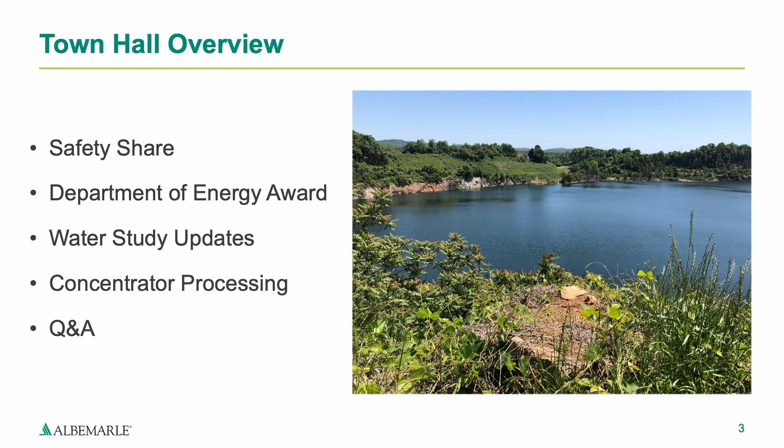Like I said, we have also the safety share. We're going to be talking briefly about the DOE Energy, Department of Energy award. We're also going to have the water studies and the concentrator. At the end, we're going to have some Q&A, so please feel free to ask questions while we're talking here and during the presentation, but also at the end of the presentation we will have a general Q&A.

Okay, with that said, we're going to get Ron Lindsay. He is going to talk about a safety share, which is our core values, how we protect our people, and how do we make sure that we work safely in every area that we work. Go ahead.

Hello, everybody. Thanks, Fernando. As Fernando said, I'm Ron Lindsay, the safety manager. Like Fernando said, one of our core values is safety, so I'm just going to give you a quick safety share. We start every meeting with the safety share, just something real quick, but it's very informative.

First thing I want to talk about, though, is if something happens here and we have to get out, we can come in the way you came in, but if we can't get out that way, we've got 2 exits on each side, so you can exit out that way as well. So that's how we go if there's an emergency. Hopefully there won't be one tonight.

What I want to talk to you about is ergonomics. Ergonomics is a big deal. They say there's about 2 million back injuries a year, but only 15% of them are due to things like falling or a car wreck. So 85% of them usually happen at home, and it's due to improper lifting, twisting, turning, that stuff. Our body's designed to stand upright like this.

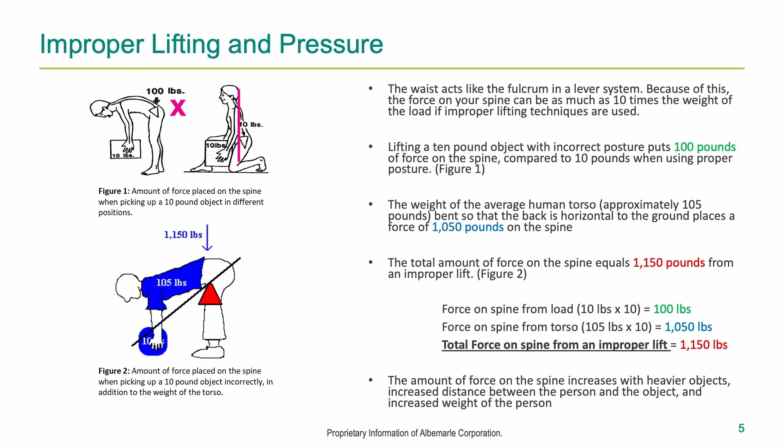Okay, so that's why it's important. We've always been taught to lift with our legs and keep our back straight, because you can see there in that picture right here, it's 10 pounds and I have my back straight. That's how much force is on my spine. But our spine is also like a lever, so when I bend over and go to pick it up, it puts 100 pounds of force on my lower back, because it's like a fulcrum of a lever.

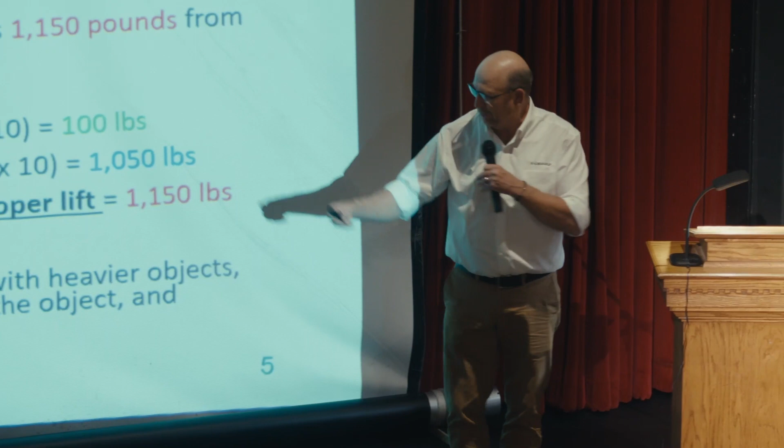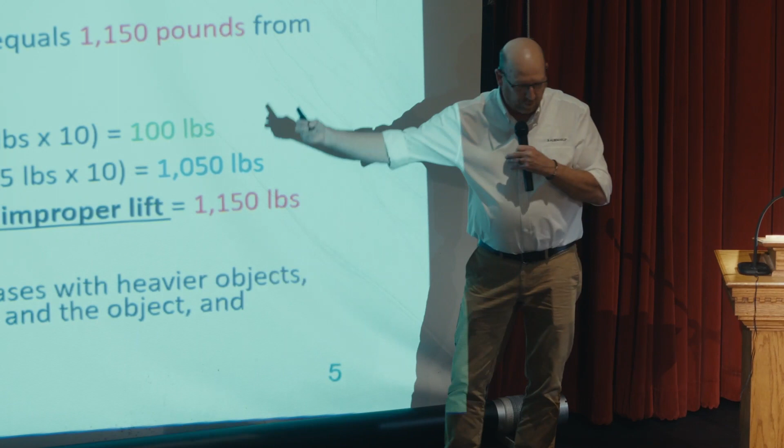Then it says the average, I don't know where they get these, the average torso weighs 105 pounds. Mine's a lot more than average. But so you put another 1,050 pounds of force on there as well, and it actually adds up to 1,150 pounds of force on your back if you're not lifting with your back straight. So that's very important to do that.

This is another good picture that we like to show. Just like when we're carrying stuff at home, at work, wherever, just keep it close into your body. You can see there, it shows you a green zone, yellow zone, and a red zone. And we've all packed stuff. You know, the closer to your body, the easier it is. You hold it clear out here, it's hard to carry for very long.

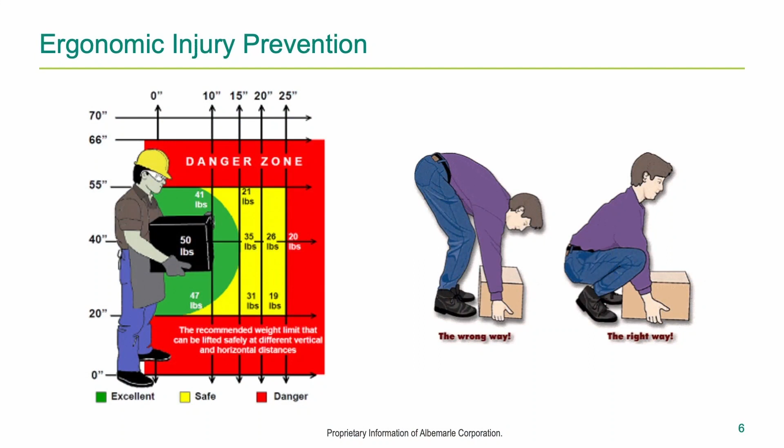And you can see here the proper way to lift. What I tell people at work and stuff is if you have little kids at home or grandkids at home, set something on the ground, ask them to pick it up, and they automatically do it this way. And then they grow up watching us do it the wrong way, and then they start doing it like that. So just be mindful of that.

This is a big one. This is a new thing that's coming about, and you may have heard this - it's called texting neck syndrome. This is another thing that blows me away too. So my torso is overweight, but my head's smaller and I don't have any hair.

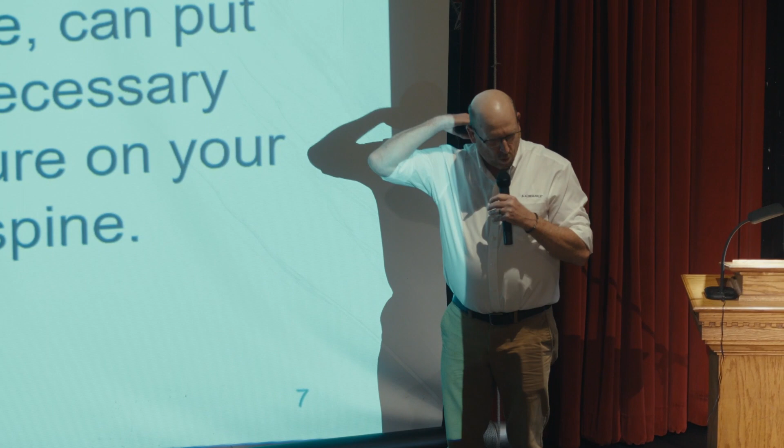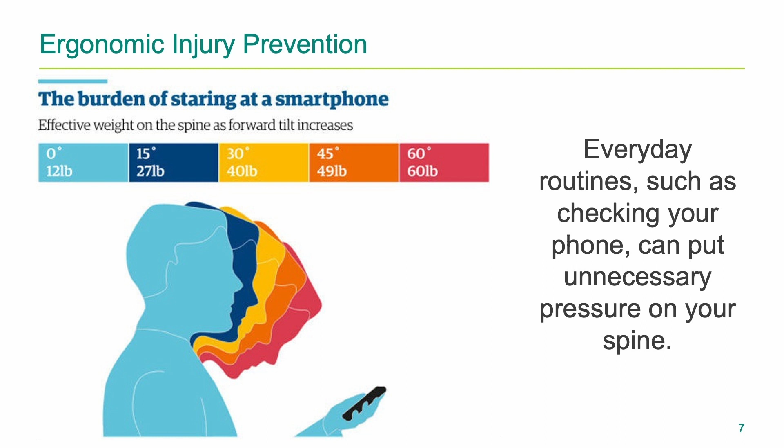They say the average head weighs about 10 to 12 pounds. So when I'm standing here with my head straight, at 0 degrees, there's 12 pounds of pressure on my spine. But when I'm looking at my phone all day like this, at 60 degrees, it increases it to 60 pounds. So just be mindful of that.

Younger kids may not be affected as much as older people. We just went through Christmas, and if you ever sat on the floor wrapping Christmas paper and got up, it's hard and it hurts - that's because of that force, that frequency, and that awkward posture. So just watch yourself. This ergonomic stuff's a big deal, and that's all I got. I'll turn it back over to Fernando.

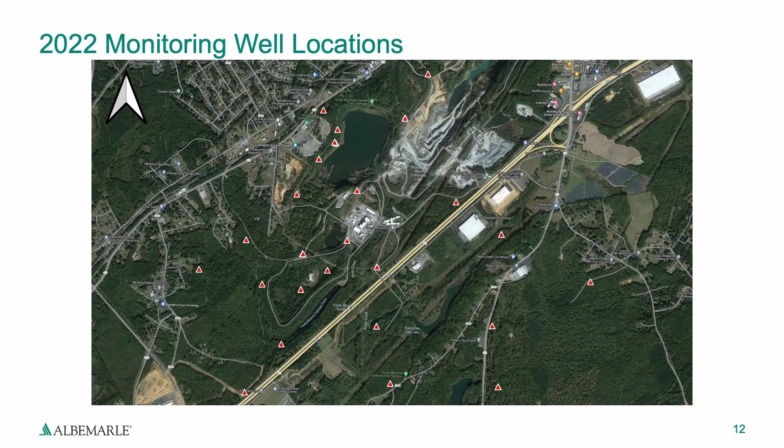In 2022, we did a lot of work to expand the groundwater monitoring network and really get all of our baseline data down for the groundwater, and really just try to understand the system and characterize what it's like on site and in the areas around site, around the pit.

The first thing we had to do was determine what else is interacting with groundwater around the site. So we had AECOM, a big engineering firm, come in and do a really exhaustive water well survey for private water wells. They used as much public record as they could, and also used Google Earth, zooming in on places where they suspected wells, where you could see wells in yards. They drove around town looking for places with the covers over wells and things like that, just to determine where there's a suspected or actual well present.

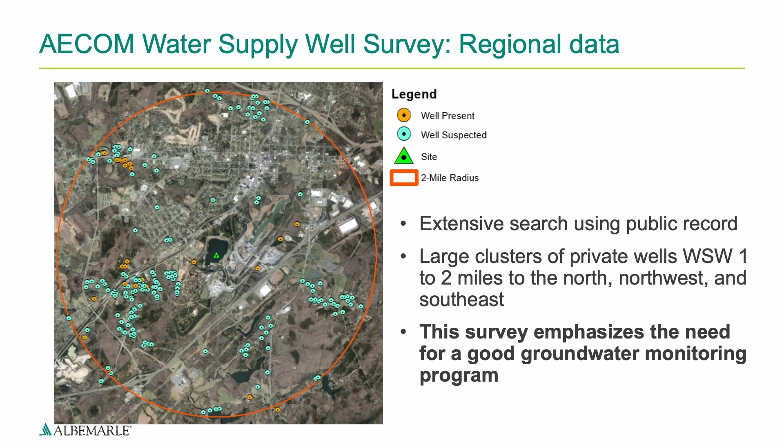Something interesting is that the North Carolina database for public water wells only goes back to 2007, so there are obviously people in town with wells older than that. They really went around and did a good job on this audit, and you can see on the map that within a 2-mile radius there's a lot of water well users and suspected water well users. So we used that information to build where we wanted to have the baseline groundwater monitoring network installed.

That's the pointer. Sweet. Okay, so

Why do you need a groundwater monitoring network? My presentation today is going to be a bit of learning for all of us on some groundwater jargon and some of the things I have to think about on a regular basis, so that when I talk to people, their eyes don't glaze over. I'll give you a couple definitions here.

When we drill a bunch of holes and install wells, we're collecting water quality data and water level data. But from those wells being drilled, we test them as well. We want to determine what's actually governing the flow of groundwater, so we do what's called aquifer testing. That's really done to determine what physical parameters in the ground allow groundwater to migrate from one place to the next.

The number one physical coefficient we try to determine, useful in just about every piece of work when talking about groundwater modeling or movement, is hydraulic conductivity. That's the parameter that tells you whether groundwater can flow easily through a media, and helps you understand what storage is like. It's always based on the pore spaces, whether it's sandy or silty material.

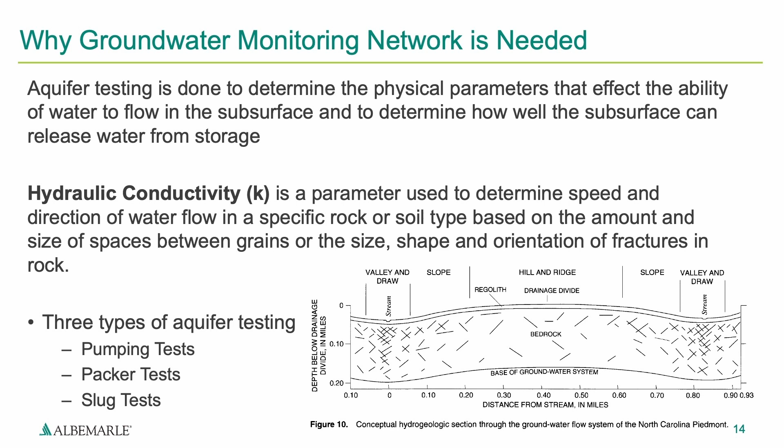If you're ever wondering what's going on, what your well might look like down below, this is pretty much what you're going into. You can see this is a weird unit, divided in miles, so they do these in tenths of a mile. Most people's water wells are sitting right in this area here.

Pumping tests: obviously you have a well, you put a pump in it, and you run the well, determining from where the water level was down to what it draws down to while pumping, and you monitor that information over time. You're taking water level measurements and recording flow at that same time unit, and you calculate from that what the hydraulic conductivity is in your well.

The awesome thing about a pump test - this is like the Cadillac of groundwater testing, an aquifer test. Let me just finish the slide real quick.

Joe, can you pick up that mic and speak into it, please? Yeah. Oh, you want me to carry it?

As I said, we pump the well, and when you pump it, the water level draws down. You record flow, you record the water level drawdown as you're pumping, and then you calculate hydraulic conductivity in the well.

But the nice thing about a pumping test is if you have the opportunity to have an observation well nearby, you monitor the water level change in that as well, and from that information you can determine what the groundwater parameters are for flow between those two wells. This is like I said, the Cadillac of doing testing for groundwater. It gives you the most information in two directions. So we did a lot of these.

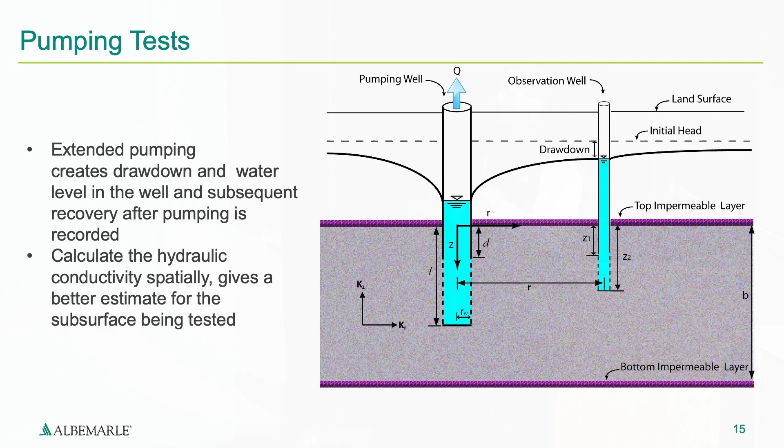We also did what's called packer testing. Packer testing is when you have this apparatus that you put down the borehole while drilling. It has on either end a lower packer and upper packer, and that's a bladder that you fill with compressed air. It presses itself out into the borehole and wedges itself in there. Then in between those two sections is an open area where you push water down the hole, you inject water down the hole, and you're testing this interval in the borehole.

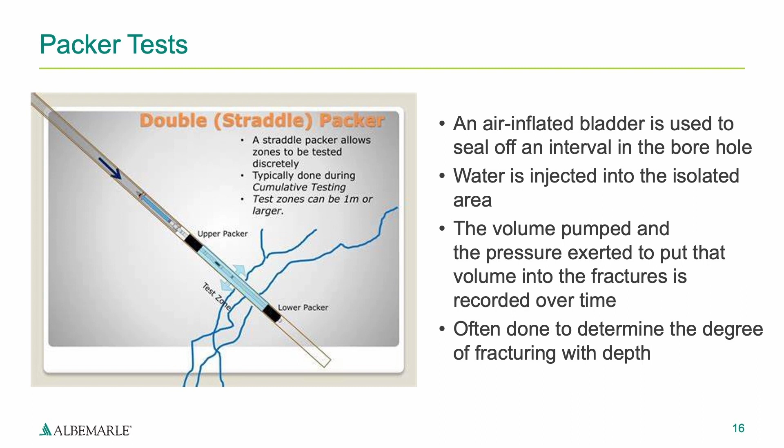So you do a specified volume, and you measure the pressure as you're having water go down the hole. You're injecting that water, and you watch the pressure. As that pressure changes and does a certain thing, you can calculate what the hydraulic conductivity is in that interval you're testing.

What this one is specifically done for mostly is to determine what the fracturing looks like as you get deeper in the ground. So tunneling operations, underground mining, open pit mining, excavations for highways, things like that, all end up doing this kind of test. It's more of a geotechnical test to determine ground strength and things like that, but it lets you know as you get deeper what kind of parameters, what kind of situations you might run into for groundwater flow as well.

Something to make clear whenever you talk to someone about packer testing, though, is that this is not fracking. You may be injecting water and monitoring a certain pressure, but fracking is a completely different operation that the oil and gas industry uses. When you frack, you fracture the ground, often using explosives or pressures that are up in the tens of thousands of PSI. We're talking about measuring like 100 PSI max type stuff.

And then the other thing is when they fracture those holes down in the ground for oil and gas, they're putting chemicals and silica sand down there to keep the holes open so that they can extract the fluids they're looking for. So we don't do anything like that when you do packer testing.

Then you decide what kind of test you're going to do, based on how quickly that water comes back. If it takes a long time to recover back to the water level it was at when you first finished the hole for drilling, you end up thinking, well, if it didn't come back for a long time, we should do slug testing, because a slug test is meant to remove volume from the water column, but it's a volume you put in there.

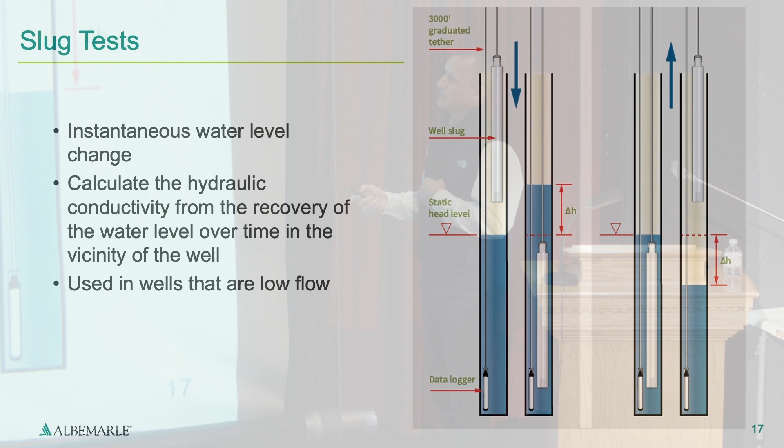So this is called a well slug, right? In this case, this would be like a molded plastic tube tied to a string on the end, or a piece of cable. You slide that down into the well, you get it below the water level, and you're monitoring it with this data logger that's down there.

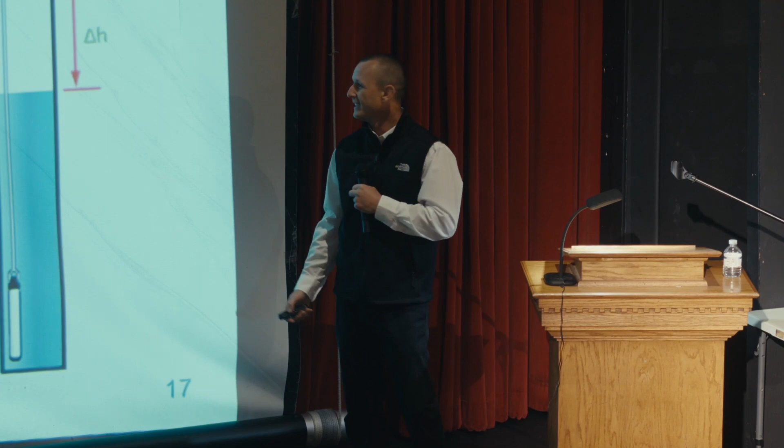So you can see when the water level recovers back, it gets used to having that volume in the water column. You usually only make the thing as long as your arm, because you need a nice smooth pull of it. You don't want it to bounce. It's funny watching people do it, because they're trying to go up on their toes to make sure they got the thing all the way out of the ground, out of the water.

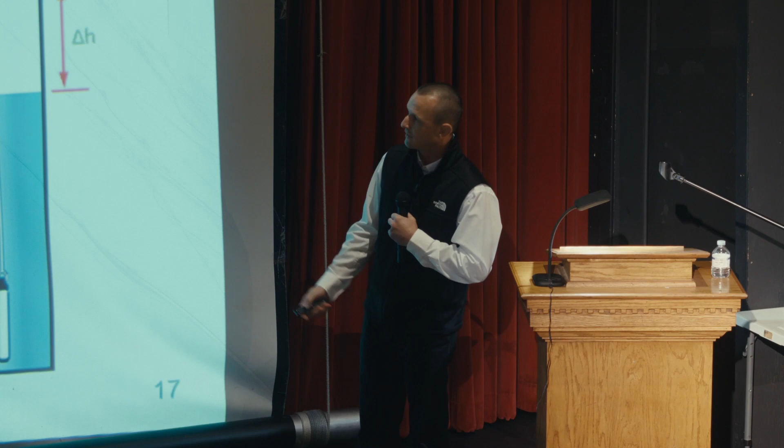But it's the same as doing a pumping test, because you're removing a known volume from the water column, same as you would do with pumping, and you monitor that head change, the water level change, and from that you can also calculate hydraulic conductivity. The only downside is you're really only getting that hydraulic conductivity at that well. So if you have to do a lot of slug tests, you hope you have them all over the place, so you can get a spatial awareness of what hydraulic conductivity is.

So again, back to that question: why a groundwater monitoring network? We need that baseline data. We need to know what we have now so that we can learn about it and tell if something changes, and either investigate or use those inputs to build the groundwater model, because you need to be informed, you need to be able to predict what might happen in different scenarios. That information all goes into the groundwater model to calibrate it.

So we have the pre-mining inflow estimates from records, we have the pit lake recovery that we were able to reconstruct, the groundwater level hydrographs from drilling in 2018 all the way up until last year and into this year. And we got these two gauge stations, for the flow in those two watersheds.

And what you do when you calibrate is you try to get that model to reproduce that data, to confirm that, okay, that's the same as on that date, that's what the water level was in that place. The reason you want this groundwater model is to inform flow rates during operation. What will the pit lake recover to after a certain amount of time? What causes that recovery?

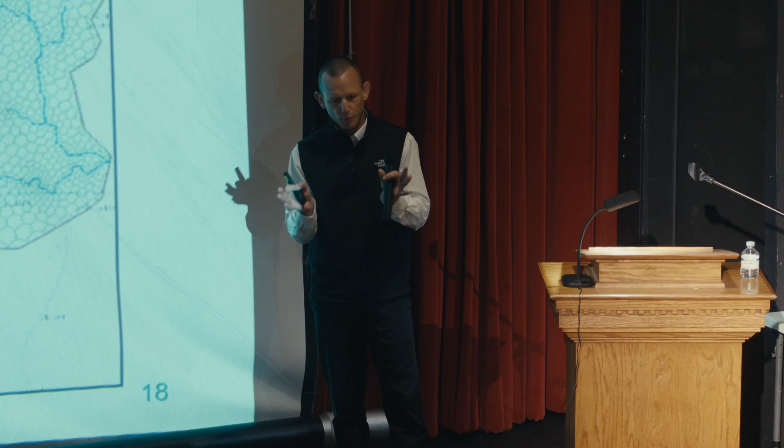You also get an idea of any possible development of the drawdown cone. And when I say drawdown cone, I mean, is there a cone of influence, a depression in the groundwater that occurs due to pumping the water out of the pit? And then, what will the levels be in nearby wells? Are we going to impact the wells, and are we going to impact the base flow in these watersheds that we are connected to?

So I'm going to go over some of the empirical data we found, because the model is great and good for determining the future from information you've recorded, but you can actually go out and measure in real life. The nice thing about being able to go out and measure things in real life is you can characterize things and get an idea of what you have in nature.

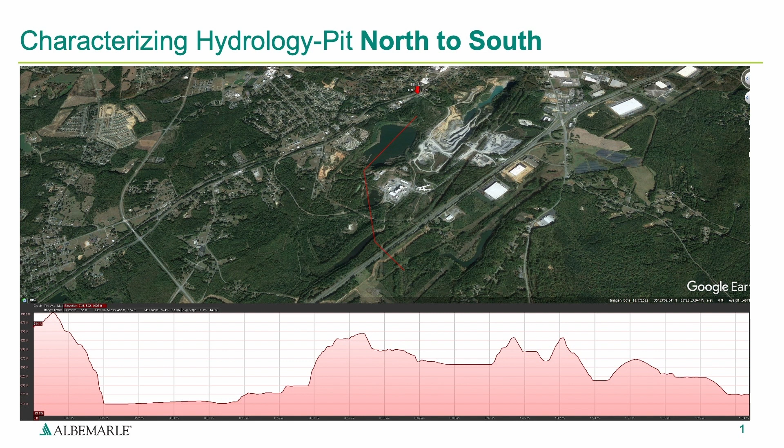So characterizing the hydrology of the site, we determined that obviously from the topography. This is going north to south to Kings Creek. The pit has a water level that's below the rest of the land around it. So water doesn't flow from the pit to Kings Creek, not naturally. That will happen by pumping.

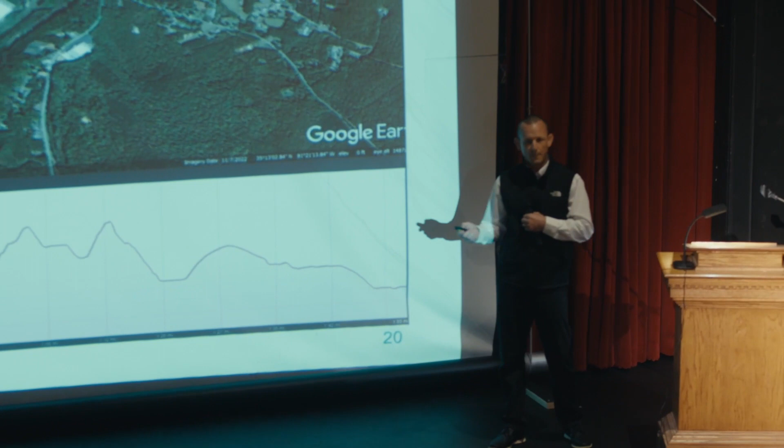And then this is the same type of graph, except going east to west. So we have west over here, going east to the Martin Marietta property, and to the east, where the Martin Marietta property is between us and there. And you can see that the pit is lower than any of the topography around it. So there's no groundwater that goes from the pit out. It's sitting in a bowl.

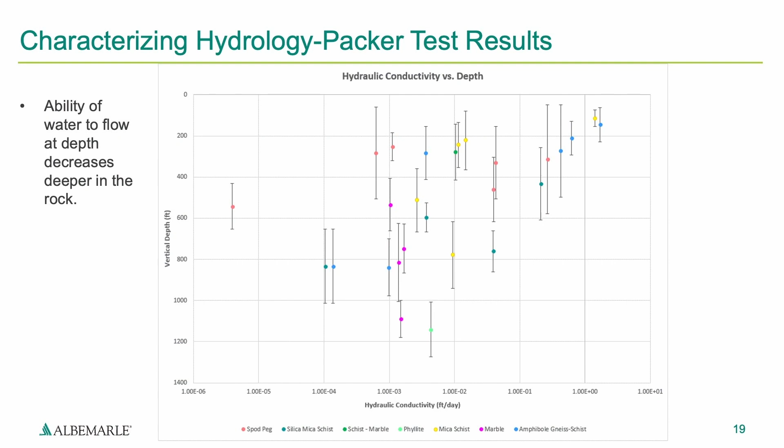And from the previous graph, we know that rock is pretty tight. It's like a bowl of cement.

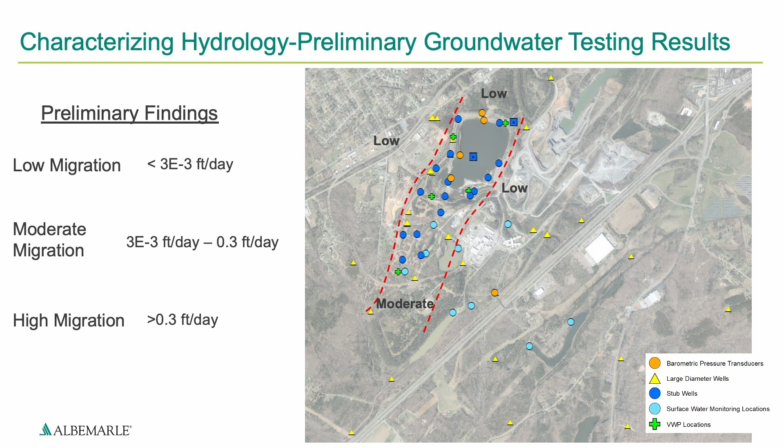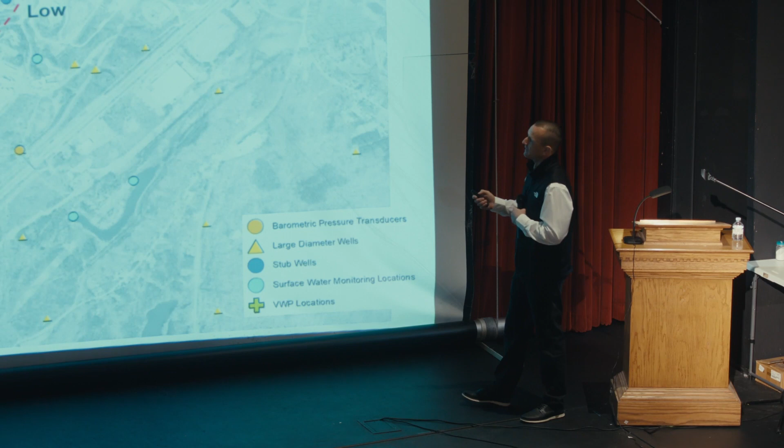And then, in my opinion, this is my favorite one. This is the most poignant. Well, we have the west, north, and east side of the pit. And we had migration possibility to the south.

And so water flow really is in this direction. You have this thing called preferential flow. Water is going to take the path of least resistance. So it wants to head this direction if it does flow at all. These values here—something to remember with groundwater flow is it's not fast. Unless you have cave formations, you really don't have water that's going to move within feet even in a year. It's very, very slow.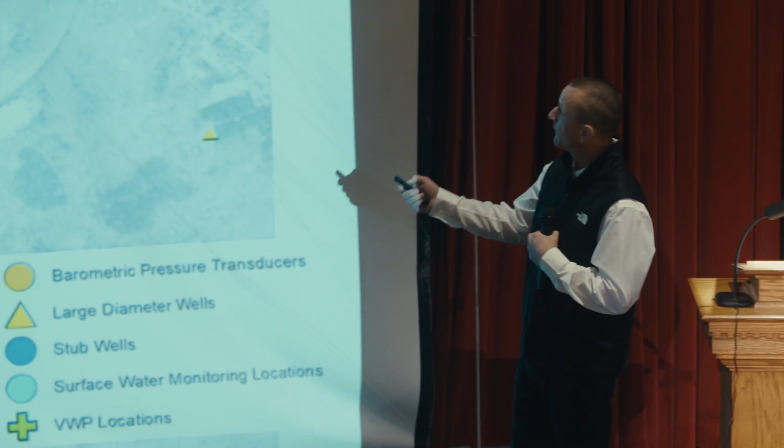Yeah, so this is 85. And 161 comes up right here.

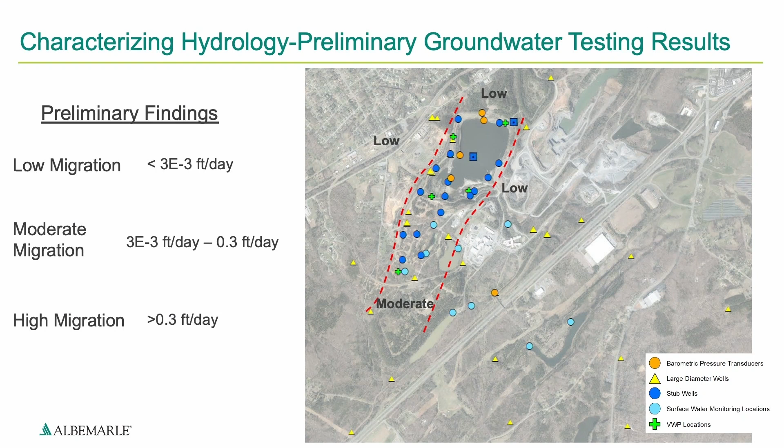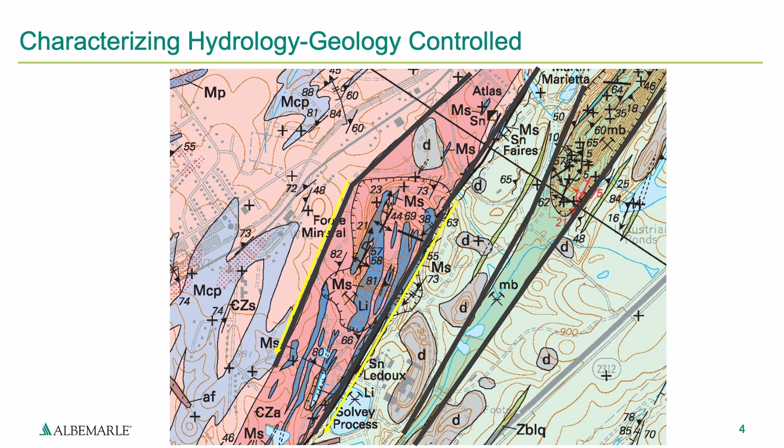And so this is the same image except with the geology. We've determined changes are—this is the Martin Marietta pit here, so there's a rock type there, a different rock type here. They're faults and folds where, as this stuff all came together millions of years ago, it ground all up and got crunched up. And so what we have is we have flow that can go parallel to this, but it doesn't go across it very well.

You really don't have flow going perpendicular across that. So that's a good thing as well, that we know that within the vicinity of the open pit, we really only have groundwater availability in this area here, which the blue is our ore. Okay, so we really only have the ability to see groundwater flow in the area that we plan on working.

That's all I have. You guys don't have any other questions?

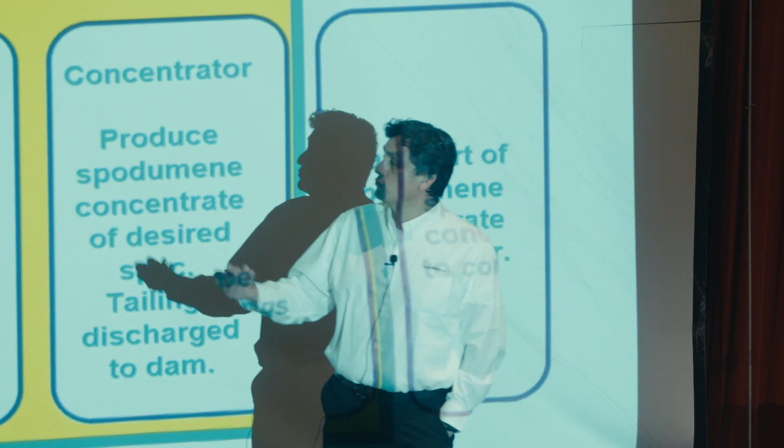I believe we've covered this in one of our other presentations, but in general this is what the project is about. We start with geology guys finding what rocks are on the ground, what is good, what is bad, and then it goes into the mine guys who figure out the best way to get it out of the ground. Once that plan is in place, the execution, which is the drill, blast, and loading, delivers the ore or material to be processed to a processing plant, which is what we're going to be talking about tonight: crushing, which is size reduction, making big rocks into little rocks, and then taking those little rocks, making them into mud, and getting the good out of there. So that's basically, in very simple terms, what we're trying to do.

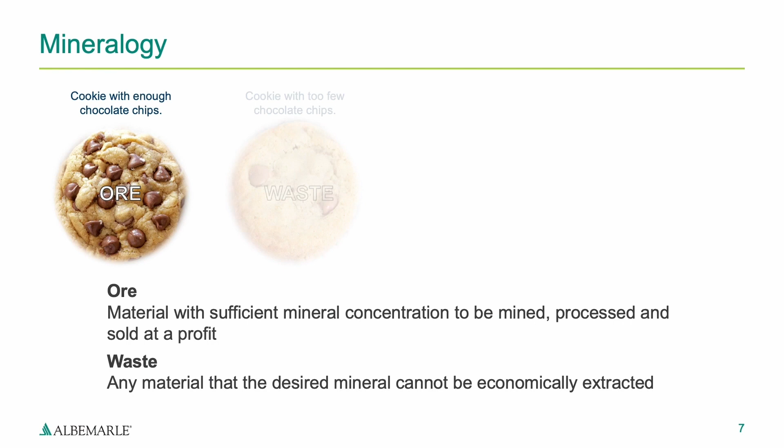And to do this, we need to talk about ore, which we've talked about before, which is a mineral or material on the ground where there is enough valuable mineral, in our case it's called spodumene, that's where the lithium is, that you can mine, process, and make a profit out of it. If you cannot make a profit because there is either not enough lithium or there isn't lithium on it, in our particular case, then it's either going to be waste or gangue.

That's what we have. So now, to keep Jeff happy, we're gonna go to the cookies.

On my prior job, the owner of the company used to use this analogy when describing what mineral processing is. It is basically: you have a chocolate chip cookie and you have to get the chips out from the dough. That's what we're trying to do in this particular case. Our chips are going to be spodumene or lithium mineral. If there is not enough of it, that's the second case, it is waste material. If it is raisins instead of chocolate chips, it's not going to do any good for us, so it's also waste material. And if the chocolate is really covering everything and you cannot separate it from the dough, then really you're not going to be able to process it. So it's, again, waste material.

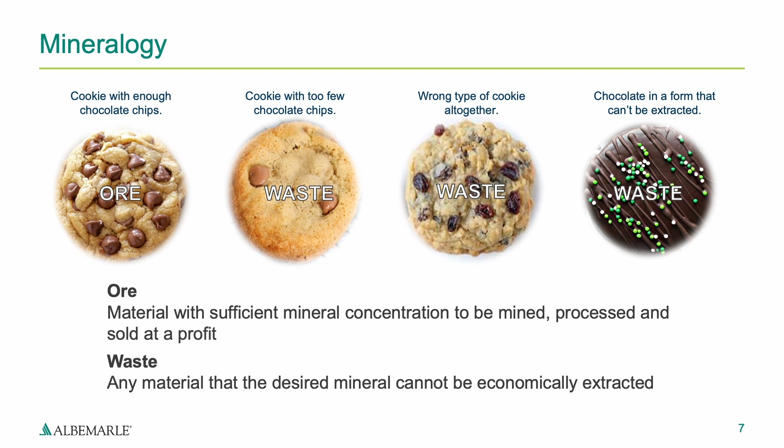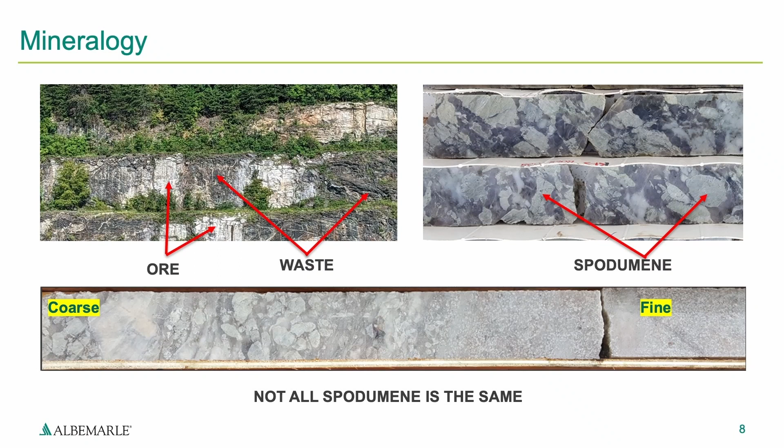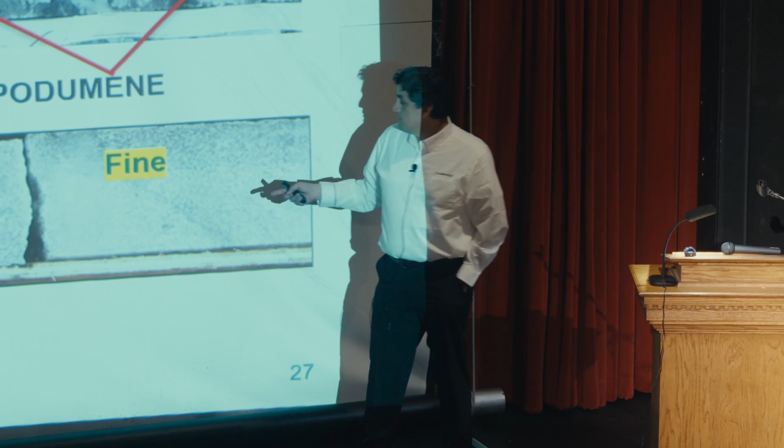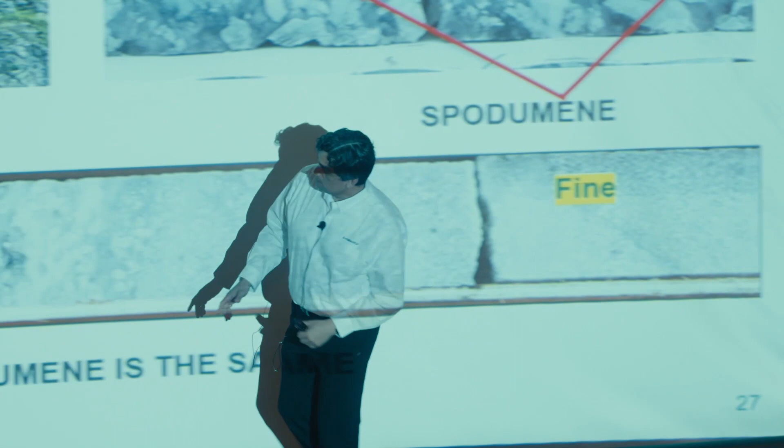Within that white, you have this, which actually has a greenish tint. Now, not all of it is the same. The image below is a drill core from a white zone. In our case, what we have is a combination of coarse, or these big grains, and then it also starts migrating, and then you have very little white specks. The challenge for us is to recover, or design a plant that can recover, both the coarse material and the fine material at the same time. You can do one or the other, but we need to do both to be as efficient as possible.

Minerals processing—you can call it a science or an art, it's subject to debate—looks at how to recover a valuable mineral out of a waste. And the same, we can keep going with ore and waste coming out of the pit.

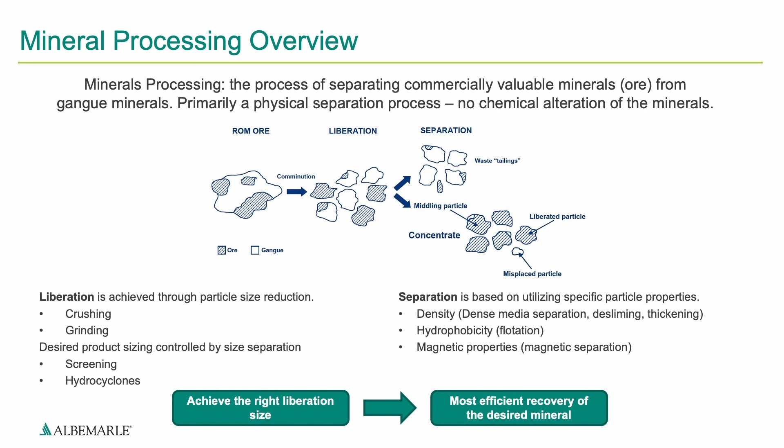Going to a size reduction, which is what we call fancy comminution, and then you break them. What you're trying to do is liberate the valuable material from the non-valuable material. And once you've been able to liberate it, you actually have to separate it.

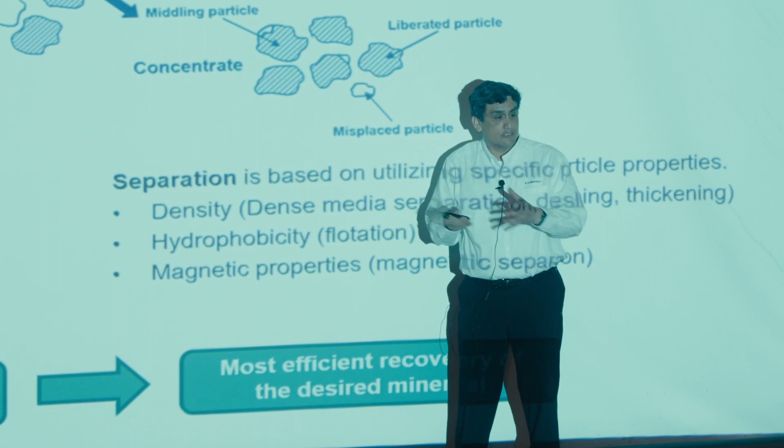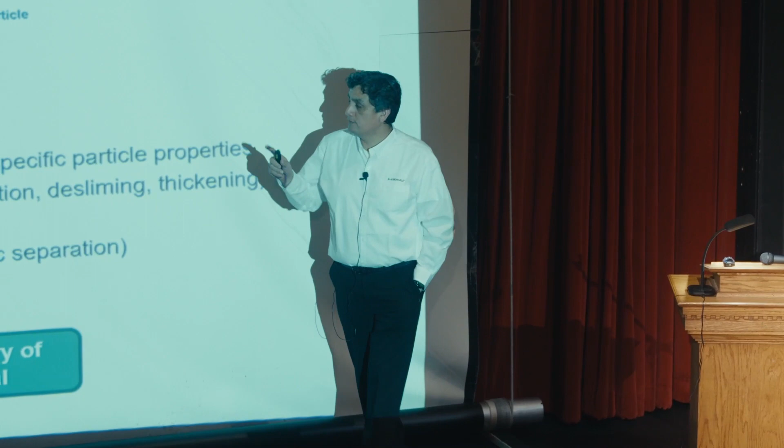So you concentrate, in our case, spodumene, and reject everything else. In Mineral Processing 101, I won't tell when I went to school, but basically you have liberation and separation—that is the core of what we're doing. Breaking, liberating the spodumene out of the gangue or waste material, and then recovering it. You tailor your operations to get the most out of it.

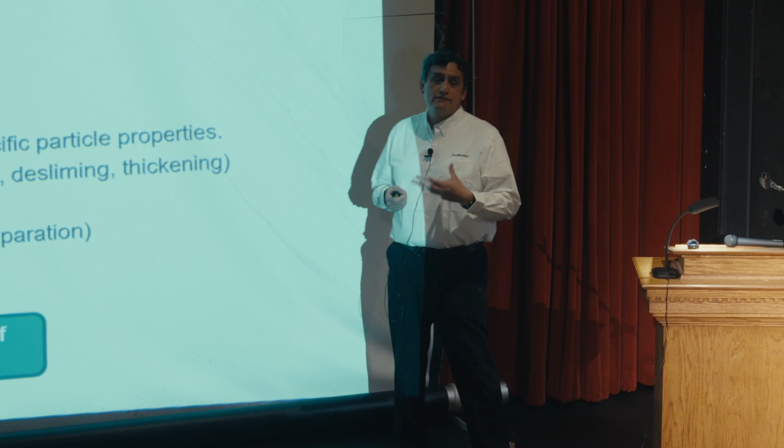One particular point I want to make here is that those separation processes are, for the most part, taking advantage of physical properties of the material. We're not trying to change their composition or anything like that—we're taking advantage of particular physical properties of each of them.

Here is a very simplified representation of the steps that are taken to process the ore that we're going to get out of the ground. So if I knew how to use the pointer, I wouldn't have to move around—I'm just going to go and move around.

You start with ore coming from the mine, and the first step goes to crushing and screening. What crushing and screening is, you see them every day at Martin Marietta: you crush, make smaller rocks, go through screens to separate into a very specific size. We need to do the same.

We need to break them into smaller particles in order to fit the right size particles to the different operations that we're going to be having in sequence. The first such operation is ore sorting.

I showed you before how we have black and white material. Basically it's a bed of ore moving through a conveyor, and there is a sensor that looks at it. When it is black, it puffs air and rejects the waste material. That allows you to reject about 10% of the mass very early in the process.

Then you've got to go to slightly smaller size. This is done at about 1 inch to 2.5 inches. And then you go to this stage of crushing and screening and go to this next step, which happens at about a quarter inch to 0.8 millimeters—so it's a very small size.

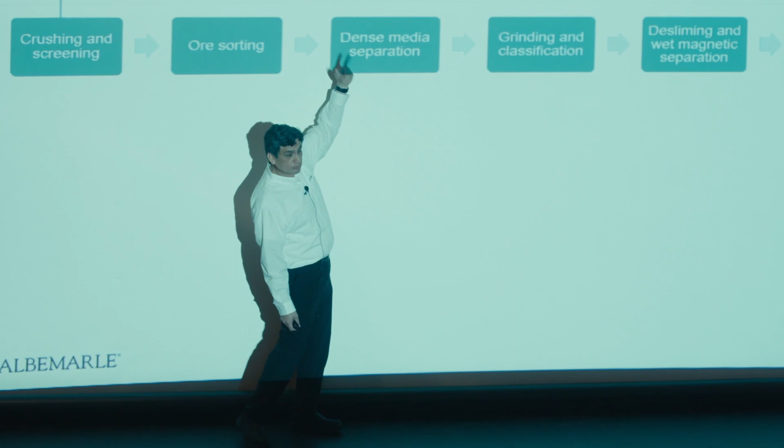So this here is the next step. Here you have two outcomes: you generate a concentrate—about 60% of our production is going to come from this stage—but you also reject a significant portion of waste material here.

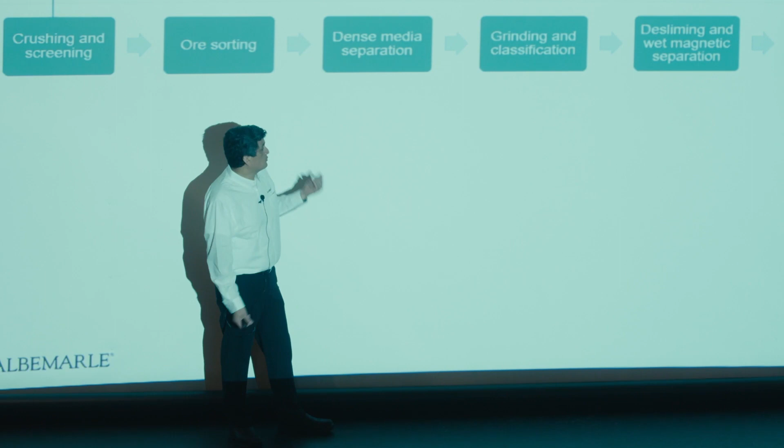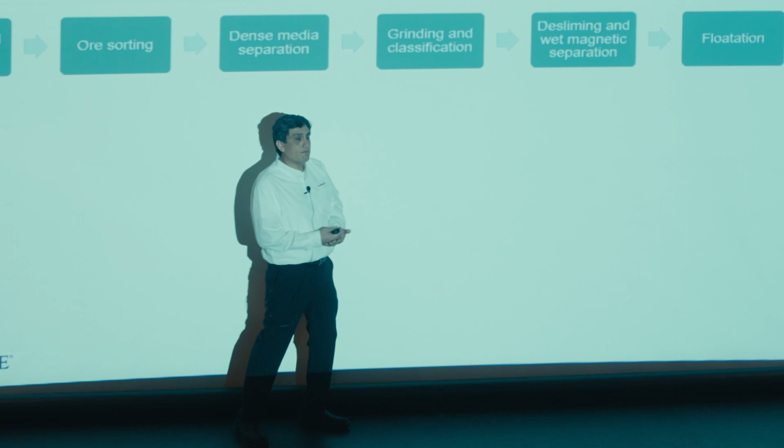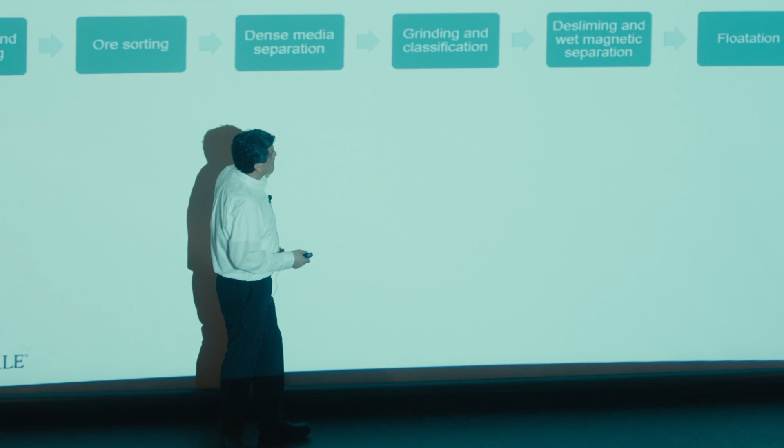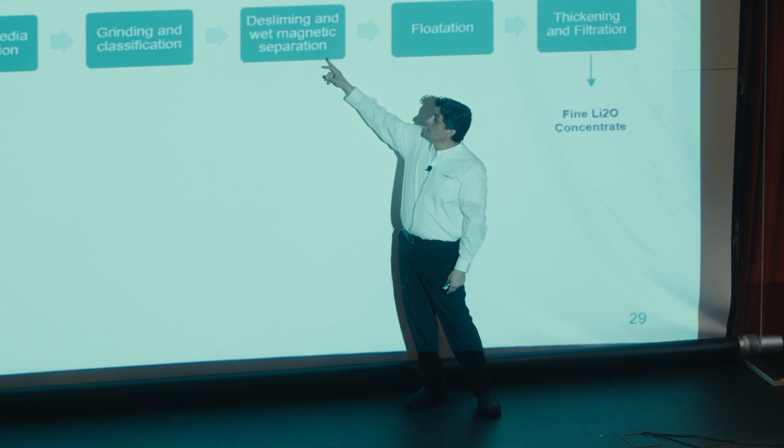And then you have to try to clean it up a little bit. In our particular case, once you go through this stage, one of the unintended consequences is that you end up with a small portion that is very, very fine material—we call those slimes. You have to remove those, and you have to remove anything magnetic that you can.

And then once you've done that, you finally get to flotation, which is another operation where you finally make the spodumene concentrate. You make 40% at that stage, 60% at the other, so about 40% is going to come out of this process.

The product from flotation is dilute. It has only 20 to 30% solids, the rest is water. So you've got to make sure that you remove as much of the water so that you can reuse it in the process, and that's done through thickening and filtration.

So let's try to cover a little bit of each step, to explain what we do and the properties that we're taking advantage of, or what we're doing.

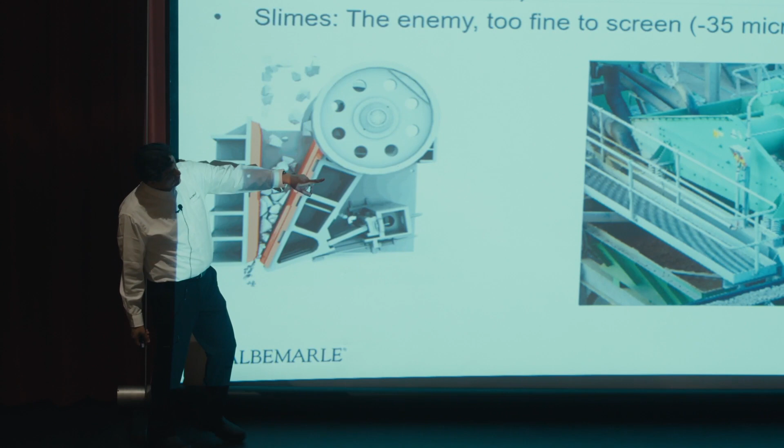Crushing and screening is pretty simple. We have one stage using this machine called a jaw crusher. It's like your jaw: you have a fixed plate on one end, and a movable plate that applies a force on the rock. That force makes them go from big to little. The same principle applies on the other one, only instead of one plate, it's a mantle rotating in a chamber and applying that force. The whole point of these stages is to make sure the big rocks become little rocks.

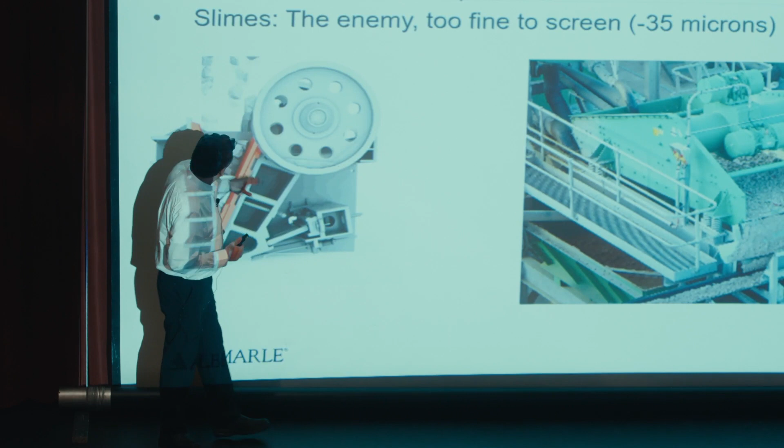The reason you have to do sequential multiple stages is there's a ratio of how big to how little it's going to get. You can only get so little from a starting size. And because we have different sizes needed for every step, we have to do multiple stages of this.

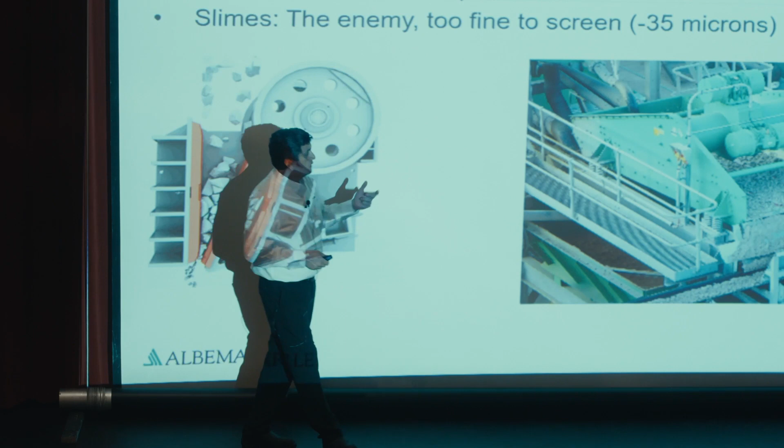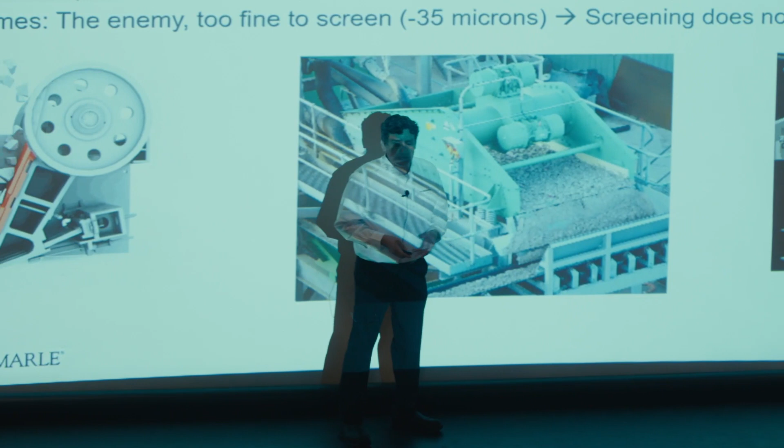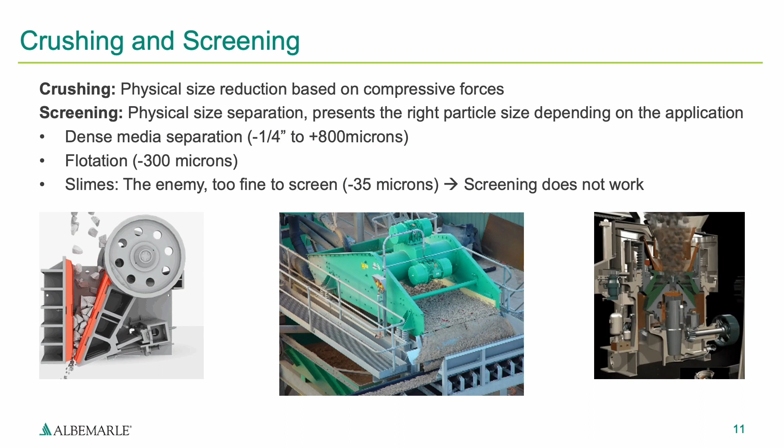In between, to control the right size for the specific application, we use screening, which is like a strainer, like your pasta strainer. It's basically just a surface of identical size holes. It shakes and vibrates, and anything smaller than that hole goes through - that's your fines. Anything bigger keeps carrying forward. Depending on what you need, this might be your product, or it might need to go back to be broken down again. You just mix and match this to deliver the right size product.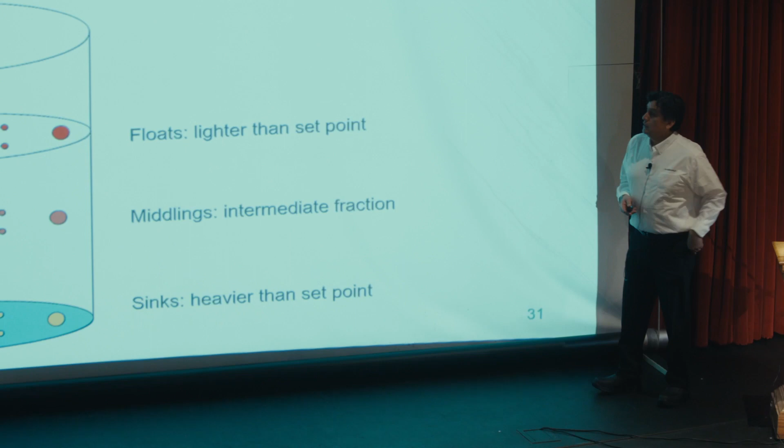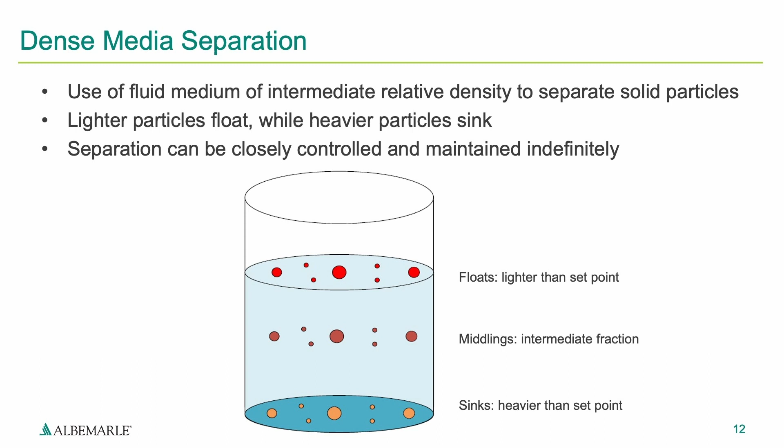Once we have the right size, we use dense media separation. That's where about 60% of our production comes out. The way you do that is you have the ore mixed with water - that's one half - and then you have water mixed with a medium called ferrosilicon, an inert material, where you control the specific gravity very carefully.

The best way I can explain it is to relate it to mixing water and oil. You mix water and oil, shake it, and the oil rises to the surface while the water stays at the bottom. It's something similar - in our case, we're mixing the solids so we can control the specific gravity. Water has a specific gravity of 1. The ore we're receiving has a range of specific gravity, and we're trying to find the point where we can separate what we want from what we don't want.

In our case, we do a first pass at 2.65, where anything that floats - meaning it's lighter than 2.65 specific gravity - is rejected. We know from test work and analysis that material lighter than 2.65 has pretty much no lithium on it, so we can reject it at that point.

Whatever sunk, which is heavier, goes and passes again, only instead of using 2.65, we use 2.9. In this second pass, we're looking at everything heavier than 2.9, which is where the lithium is. This gives us a clean concentrate by recovering that heavy material. That leaves us with what we call middlings - either heavier than 2.65 or lighter than 2.9, the in-between material.

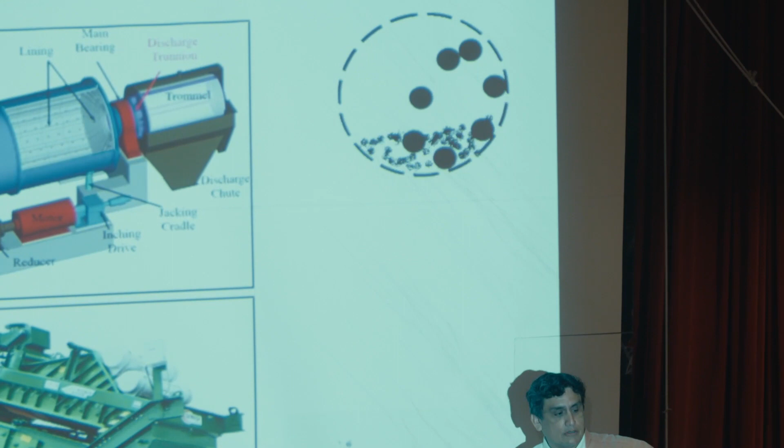About 40% of the volume is filled with steel balls, and those balls, as they go up and down, hit the particles and break them down repeatedly. So you feed it from one end, it comes out the other, and then it goes to the next stage.

That's what's called a Derrick screen, another version of the larger screens used in the process. These are vibrating, and the reason they look goofy is because you're trying to maximize the space, so you stack them one on top of the other - that's why they look different.

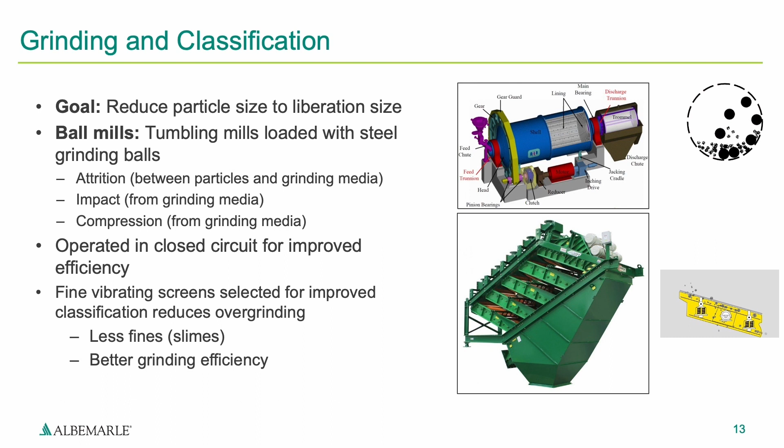Anyway, they come out, the water and the mineral come out. They go here, and it's shaking. Anything, in our case this is 250 microns, that is finer will go forward in the process.

Anything that is coarser will go back and be ground until it's the right size. The reason we're using the screens versus the more traditional equipment, a hydrocyclone, is because this gives us a cleaner cut, meaning it allows us to be more efficient classifying and prevent making more and more ultrafine material that we have to waste out anyway.

Now, once you have that slurry, we go to these two stages. Magnetic separation, which I'll try to see if it works or not. Basically, when you get out of the mill, we've used grinding media that is steel. Steel is magnetic, and very small shavings of that material carry with the mineral. So we put it through a drum that has a magnet at the bottom, and as it rotates, it captures that magnetic material and allows the rest to go forward.

So in this, I don't know if you're going to be able to see, but we put a whole bunch of bolts inside with glass, and you can see if I take this out, they fell off. Then, because there is a magnet, you can start picking them up. That's a simple step in that stage, just getting rid of magnetic material.

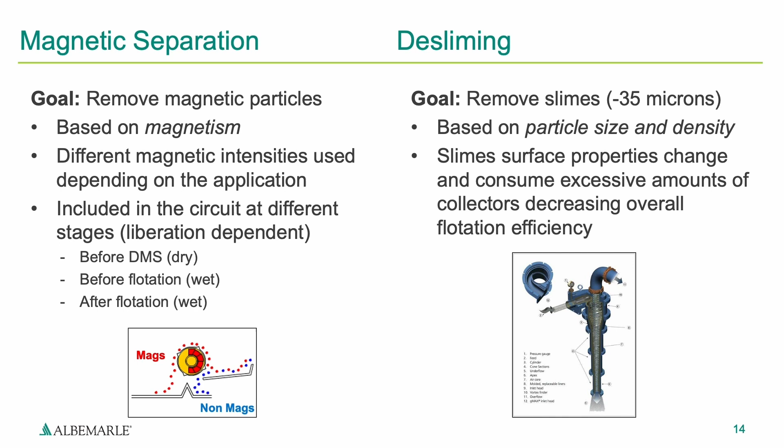And then we go to these desliming cyclones, and that's my favorite part. You feed the material here as a slurry, water and solids, at a decent pressure, and it starts swirling. As it swirls or turns, the big particles tend to go faster and attach to the wall of the cyclone, while the smaller particles go towards the center. This is a cylinder, and then it's a cone.

As it goes down into the cone, the space makes the small particles get squeezed out, and they go in the opposite direction and come out. That's how we get rid of that very fine material that is very hard to process. And then the coarse particles go out at the bottom.

This is no different than, I don't know how many of you have seen, the Dyson vacuum cleaners or cyclonic vacuum cleaners — it's exactly the same principle. In fact, we've been doing this probably 60, 70 years before Dyson was cleaning houses. So this is pretty well understood technology.

And then the final step in the processing end to recover spodumene, in our case, is flotation. And flotation, what it is — we're trying to make particles not like water. And to do that, we use two reagents.

Those reagents are, first, a frother. Basically what that does is changes how the surface tension of the water works. If you put your finger in a glass of water and gently squeeze, eventually your finger is going to go through the surface into the water — there is a force required to break that surface. So what the frother does, which in our case is an alcohol, is make that surface a little tougher, so more force is needed for your finger to go through.

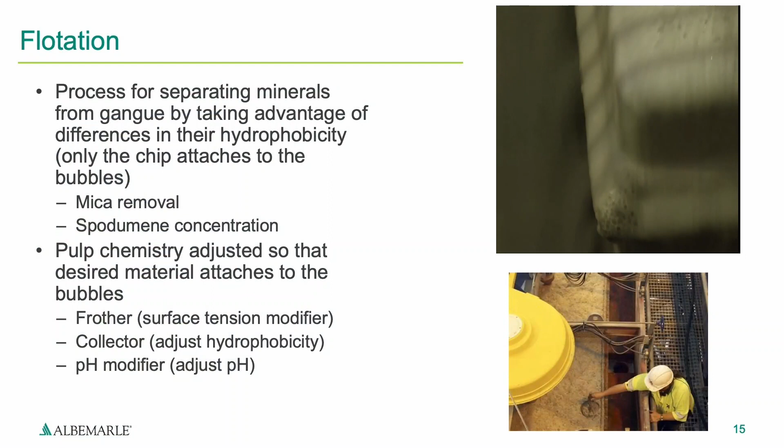Now, it's a little more tricky than just that. You also have to control at what pH you're going to operate. In our case, for spodumene, it's a pH of 8, regulated using soda ash. That's the most efficient range where that recovery happens. Go higher, and other things get picked up. Go lower, and you don't pick up as much. So it's just a balance, and you're always tuning to get that to the right place.

But there's no chemical change. Everything up to this point is just taking advantage of a physical property. And once you have that concentrate, the last step is to make it...

...into a form that you can ship it. I've mentioned before that this is usually 20-30% solids, meaning 20% solid and 80% water. You go into a big settling tank, like you've seen in sewage plants - probably shouldn't use that example, but it's very typical there.

And you add what we call a flocculant. A flocculant is like a glue-like material - a long chain that has arms, and the solids attach to those arms. The more solids they attach, the more that floc weighs and the faster it settles. That allows you to separate the solids at the bottom from the water on top.

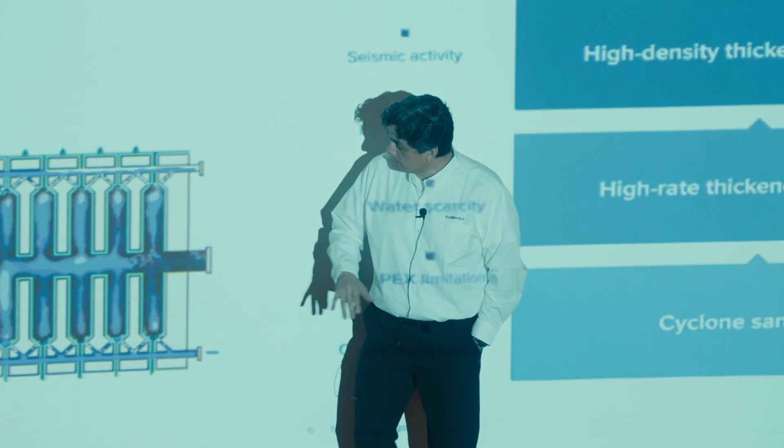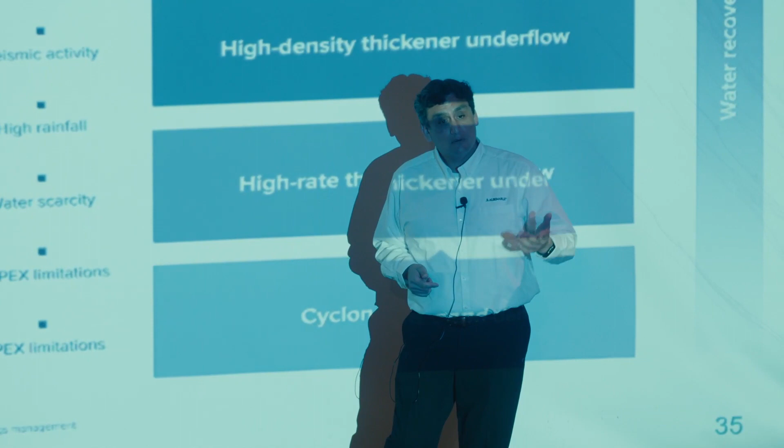You come in at say 25% solids, and come out at about 50 to 60% solids. The very last step is feeding that into a filter press, which basically squeezes the water out. And at that point, we can happily ship, hopefully, our concentrate in a couple of years, sometime in the future.

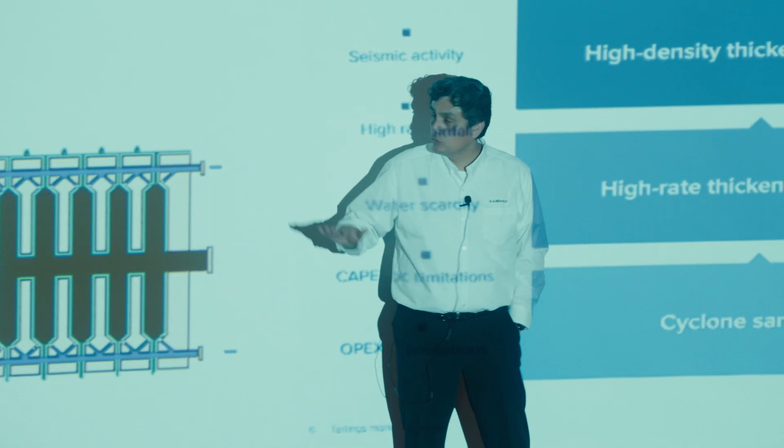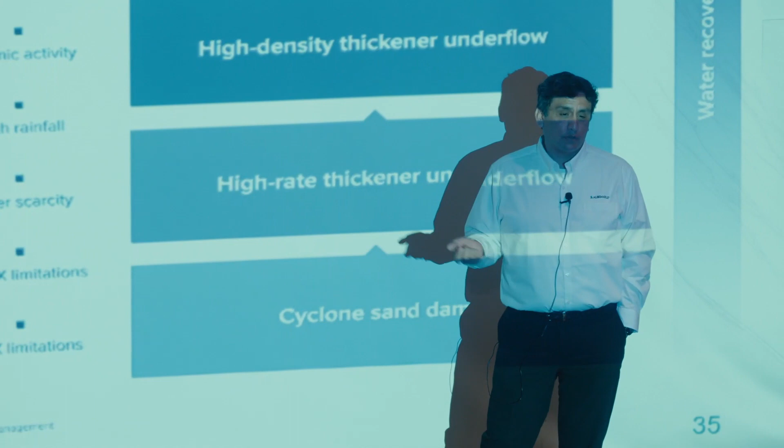The other thing we're doing here is we're not only thickening and filtering our concentrate, we're also filtering our waste streams, or tailings streams, and storing them on site. The main reason is to use the least possible amount of water in the process in the most efficient form possible. So that's about the extent of it.

And I think that was the last for me. Great, thanks very much, Henry.

And now we have concluded our presentations. I think we have seen very interesting studies that we are doing on the water part of the hydrology and also the concentrator, how the ore is going to be processed to become our final concentrate of lithium.